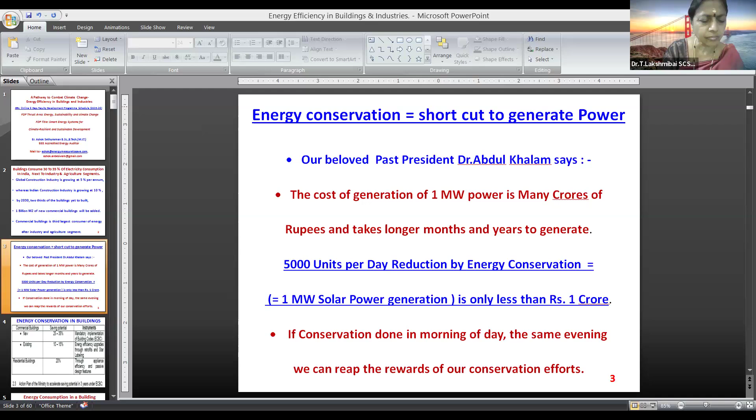Now we can see PDF, sir. In the PPT, at the top, there is a slideshow icon; click from beginning. It is in PDF format. One suggestion, stop the screen share, start the slideshow, and then reshare only the slideshow. Sir, can we share your slides? I'll try once more. Yes, you can select slideshow. My slides are moving? Yes, it's moving. Sorry for the inconvenience. No issues.

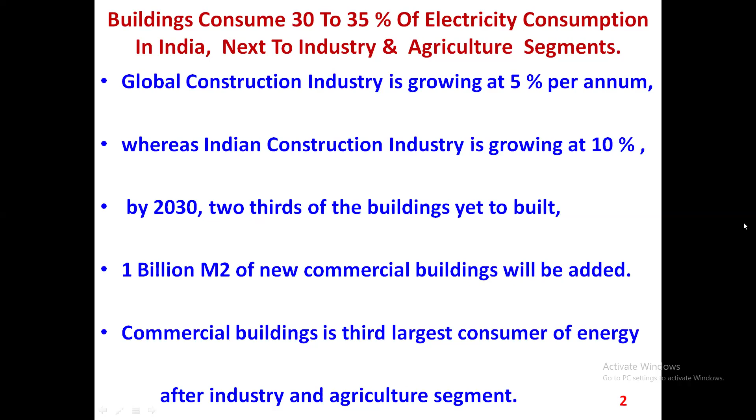In India, the building segment is the third major energy guzzler. The consumption of energy is going up, especially in the commercial segments, and the construction industry is growing at the rate of 10%. Almost 1 billion meter squared of commercial building is going to be added each decade, and buildings are going to be the largest consumer of electricity. Then comes diesel for standby usage and LPG usage, especially for residential buildings.

Here, I would like to emphasize what our beloved past President Dr. Abdul Kalam used to say about energy conservation and management, especially why it is important at the moment for a country like us.

Throughout the world energy prices have shot up, and still we are giving a lot of subsidy to domestic people as well as industries, whereas if you visit the coal mine you see how hard it is to generate energy in the thermal stations, because coal is the base load for us, the major way of producing electricity for our Indian electricity distribution system.

The cost of 1 megawatt may be many crores. For a solar rooftop it is around 4 crores, for a windmill again 6 to 7 crores, and for a super thermal station of say 500 megawatt, you have to invest almost 2500 to 3000 crores.

Whereas with energy conservation, whatever 1 megawatt solar rooftop gives us, the same 5000 units per day can be recovered or reduced through energy conservation. In fact, in energy audits we've done in many industries where they've done solar rooftop, they spent almost 5 crores for 1 megawatt solar, but were able to reduce their energy consumption by 5000 units per day by spending just around 80 lakhs, less than 1 crore. This is where energy conservation gains priority in industry, and it is very much applicable to institutions as well.

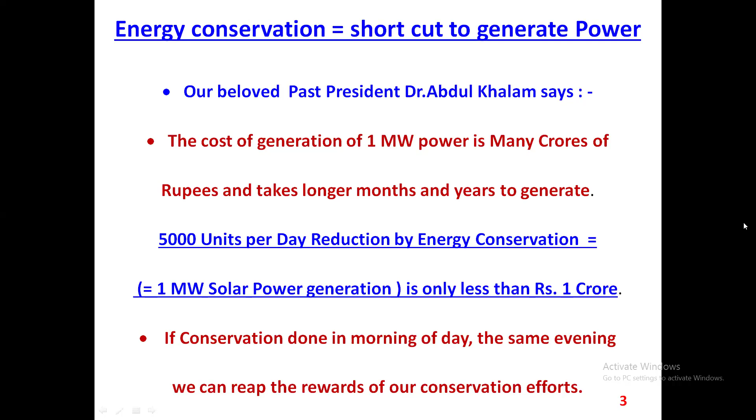If you see the energy conservation possibilities on commercial and residential buildings, almost 25 to 35% is possible for new buildings, thanks to the ECBC code, Energy Conservation Building Code by the Government of India, Bureau of Energy Efficiency. They give an in-depth analysis of all possible energy conservation and efficiency measures that can be implemented in each new commercial building. For existing commercial buildings, a minimum of around 10% is possible.

Energy efficiency upgrades through star rating are not only applied to the domestic side but also to the commercial side, and to HVAC systems too, because HVAC - heating, ventilation and air conditioning - consumes almost 50% of building cost, especially in commercial buildings. Residential buildings are also towing the line here.

People who used ceiling fans have now started switching over to air conditioners, and air conditioners which consumed almost 2 kilowatts per ton have come down to 1 kilowatt per ton, thanks to the inverter mode of operation, with a lot of inputs coming to the domestic segment from the industry side.

Especially in the residential segment, it's not only about appliance efficiency but also the passive design features of residential buildings - that's one aspect. The other aspect is that almost 20% energy saving potential is possible through appliance efficiency, the way of operation, and practices done to control or conserve electricity.

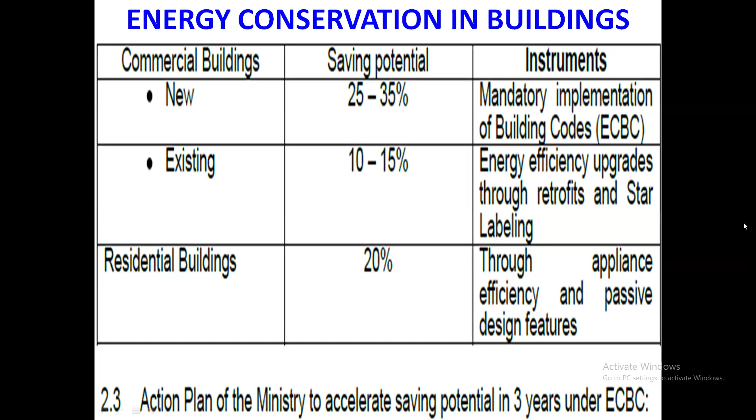So energy conservation or consumption is not only dependent on the type of building, it has to be efficiently designed and constructed, and also depends on the interior gadgets which are used. This is more important.

If you see some of the old buildings, the ceiling height is almost 10, 11, 12, or even 14 feet. In some decade-old educational institutions, we've seen ceilings at almost 15 feet, so you can see the attic ventilation is more in that building, and the building is always cool inside.

Now coming to the latest commercial or residential buildings, how it can be efficiently designed and constructed so that the lighting and ventilation can be improved over the existing system.

This is more important - the lighting arrangements or lighting accessories, the lighting system, and the luminous efficacy part of the lighting circuit. This is more important for the users in the premises as such.

The system of air conditioning can be a water cooled system for daytime usage, and an air cooled system for night time usage. Since we are tropically placed in India, we can make use of the ambient wet bulb temperature, such that we can use water cooled air conditioner packages - not the split AC or small ACs, but packages around 100 tons, 200 tons, or even 1000 tons. Normally many commercial buildings have started using water cooled versions, or the adiabatic version of air conditioning, then comes the air cooled version in the night time, just to manage the daytime and night time operations. The cooling and ambient wet bulb temperature matters more, especially in air conditioning usage - that is made use of here.

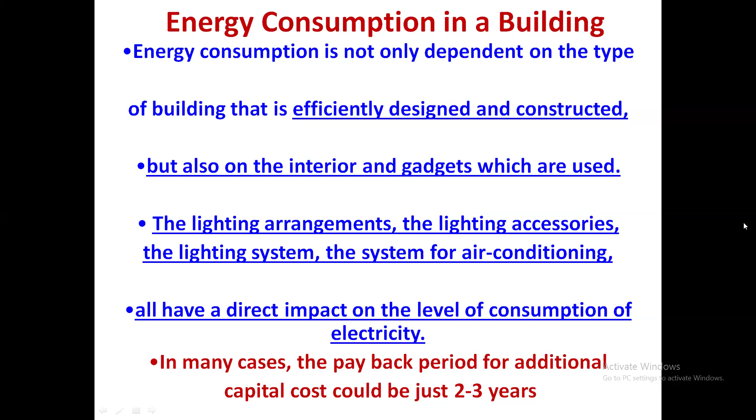If you basically see the energy balance of any given building - let's say an IT park building, a commercial building, or a hospitality building - the chiller load is almost around 50%, and the EB distribution is whatever it may be. The UPS is needed very much for some sophisticated equipment, computers, and other sophisticated systems where you cannot have downtime.

And the air handling units - this is where I am focusing more now. Normally we understand that a pathway to climate change, especially in India, can happen only through more air circulation than air conditioning. I'll repeat it again - if you concentrate more on air circulation, definitely the air conditioning can be optimized.

I will go in depth in many of my slides with case studies. This is where we want to utilize the air circulation inside the premises, how fresh air can be brought inside. This is part of the ECBC scheme where the government mandates fresh air provision in any IT building or hospital building, to maintain indoor air quality. Ultimately we boil down to indoor air quality for a given building, and at the same time the CO2 or CO present in the premises also needs to be maintained - if it goes beyond the limits, that will sicken the occupants. This is where we are concentrating more.

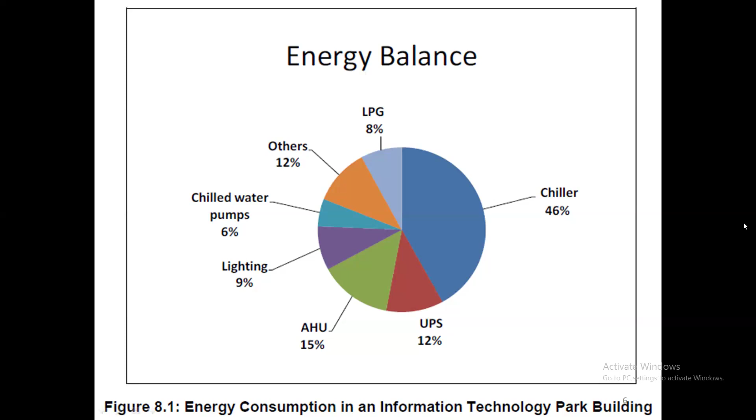Then comes LPG, which is used in commercial buildings as well as on the domestic side. There also a lot of changes are happening now as such.

This 2017 and 18 ECBC code by the Bureau of Energy Efficiency gave a lot of inputs. They have clearly demarcated what is the EPI, the energy performance index for a given building, and what is the EPI ratio for the proposed building compared to the existing standard building.

The EPI ratio decides if this is applicable to institutions like our colleges, IT buildings, commercial buildings, hospitality buildings, and even residential gated community buildings. It's calculated as the annual energy consumption in kWh divided by the total built up area. The unconditioned basement, where cars are parked, is excluded from this calculation.

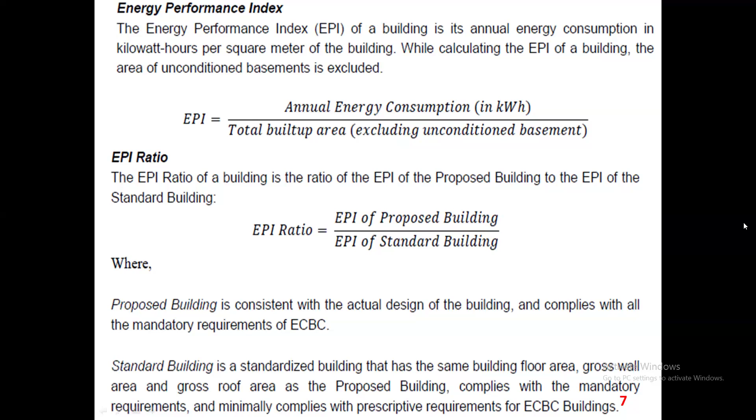This total divided by the total area gives the energy performance indicator, which is the benchmark for each and every building. When we do energy audits, even from colleges, we can do energy studies, walkthrough audits, and energy surveys to see where energy consumption is happening and how it can be optimized, reduced, or controlled. So the standard building versus the proposed building as per the ECBC, Energy Conservation Building Code - what is the difference and how can it be achieved? We will go in depth on this.

If you see the government norms, it starts from 100 kilowatts for a public utility building, and many of these buildings are mandated to have energy audits done. That is why building energy auditors have come into play now, and it is in force. Many college staff and professors also opt for this.

One is industry based energy audits, and they also take up building based energy audits - we have ample scope because the third major energy guzzler is buildings. This includes commercial buildings, hospitals, IT parks, office buildings, banks, insurance companies, and other public utility buildings - they are all supposed to have energy audits done and start reducing their consumption for sustainability.

Ultimately, we are all working towards ESG. This is where every college or building owner is made responsible for their energy consumption, and they are made responsible to reduce their energy consumption as well.

So office buildings, hotels, hospitals, retail malls and IT parks come under the 4 climate zones across the country. Apart from that, the climate zones also vary - one is warm and humid, another is composite, and another is hot and dry. A place like Rajasthan shows the hot and dry climate, while a place like Chennai is warm and humid, and some internal areas are composite.

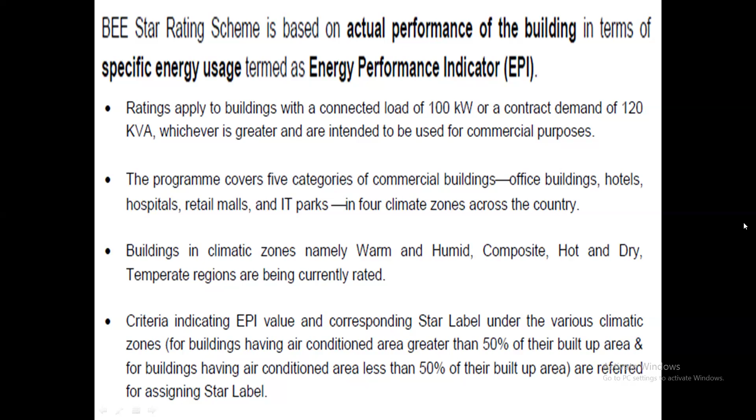I am taking a case study on why the energy performance indicator for a given building varies due to envelope optimization - building envelope optimization, lighting optimization, HVAC optimization, and controls. Controls means now the trend is, previously buildings only had a BMS. Now building energy management system is incorporated into the BMS system, and ultimately the goal of the building is to reduce consumption based on the benchmark, and see how much they are able to reduce it.

This is a CESE building at IIT Kanpur. The case study shows that through envelope optimization, consumption went from almost 240 units to 208 units. I will go into how this can be done in the next few slides, and also the lighting optimization.

For lighting optimization, now daytime lighting, light pipes, and polycarbonate lighting are coming into play, where the light needs to be distributed equally inside the premises - that is more important. Some LED applications are getting localized, whereas the lighting design or luminous application needs to ensure the distribution is smooth, scattered and diffused.

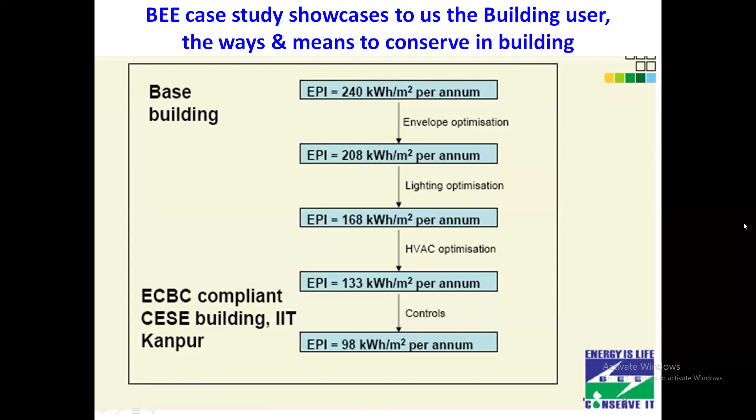So you can see the windows, roof, skylights, doors, openings, the design features. In the building envelope, what we are seeing is the visual and thermal comfort of the occupants. The building envelope takes care of both the visual comfort as well as the thermal comfort of the occupants. This is concentrated on by the architects as well as energy auditors and energy professionals, who can work together with the architects and make the building envelope more efficient than the existing one.

Then comes the mechanical systems and equipment. By mechanical systems I mean an air conditioner. It may be a split. The window air conditioner is gone; it has gone totally obsolete. The split air conditioner, a package air conditioner, a ducted split, or a multi-tonner package. All these things come in the next line.

Then the interior and exterior lighting. Thanks to daylighting, more daylighting provision is there. Many IT offices have understood that daylighting has to come from sunlight, because lighting from the sun is almost 600 lumens per meter squared, whereas whatever you get from a 4 feet LED tube light is around 100 to 110 lumens per meter squared only. So solar lighting is given priority, especially in buildings. Many buildings and colleges have a dome where the sunlight comes inside as a light pipe, and it is made use of inside.

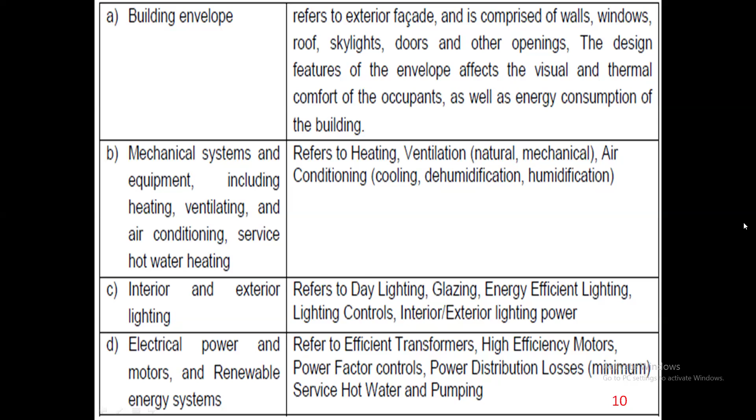Coming to the thermal side of the building, thermal comfort, what is the heat loss comparison? If you see the U factor, I'll go in depth on the U factor also. We have seen single glazing and double glazing windows. Many modern buildings, green buildings, go for double glazing windows so that the heat loss across the windows is minimum. The windows are the areas where not only light but heat ingress comes from the sun to the inside. This can be arrested only if we go for double glazing, especially in the windows.

The light from the sun passes through and the room stays cooler. You can see the glass with coating. Instead of going for double glazing, there is glass with coating. This is a retrofit that has come. For any replacement we suggest for the industry, a retrofit is also possible. So first let us try the retrofit. If the effect of the retrofit is less or it gets derated, then it is better to go for a replacement, especially with double glazing.

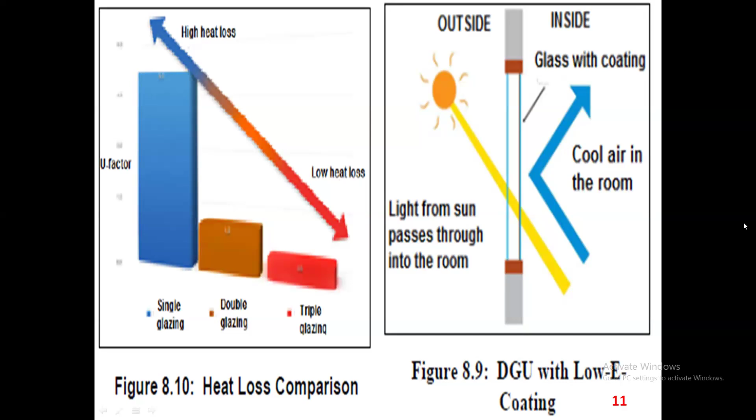Especially you can see the outside visible light and the solar radiation. These are all the areas that are relevant to daylight harvesting basically. See, for an EEE department, why I am talking about the buildings' thermal side is because the thermal side of the building decides the energy consumption for the given building. The solar heat ingress for the given building is very much more, so definitely that needs to be controlled.

So this is where the visible light, the solar radiation, and the U value come in. Ultimately the U value denotes the conduction of heat gain through the glazing unit. The lower the U value, the better it is for us.

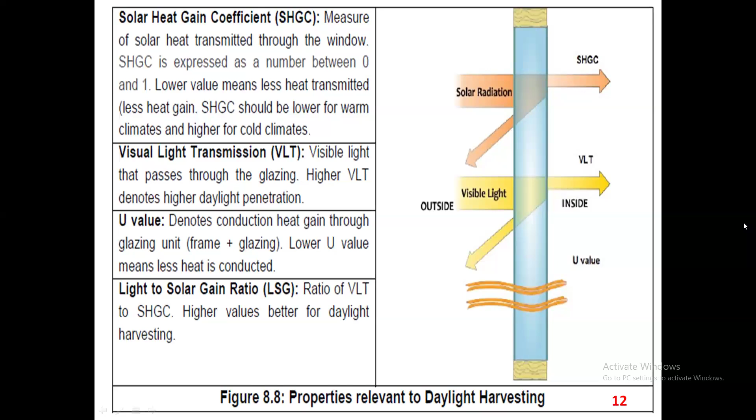This is the three-tier approach the Bureau of Energy Efficiency, through the ECBC code, has suggested to all building owners. First, heat avoidance. Not in Chennai, but in Telangana, the government has mandated only white roofs for heat avoidance. Then comes passive cooling, where attic ventilation can be improved. Then comes mechanical cooling, the tier 3 approach, where heating and ventilation through air conditioners are done.

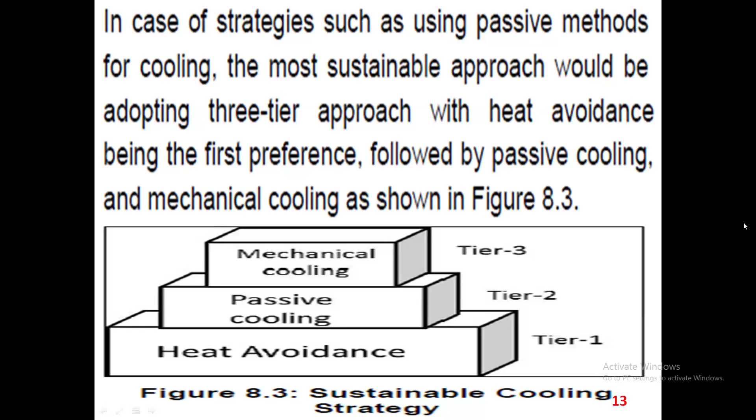So like the Pareto principle, if the small subsystems are operated smoothly and efficiently, the compressor run hours can also come down. This is where every industry or building management system is working on how to reduce compressor run hours and how to make the compressor loading run efficiently during those run hours.

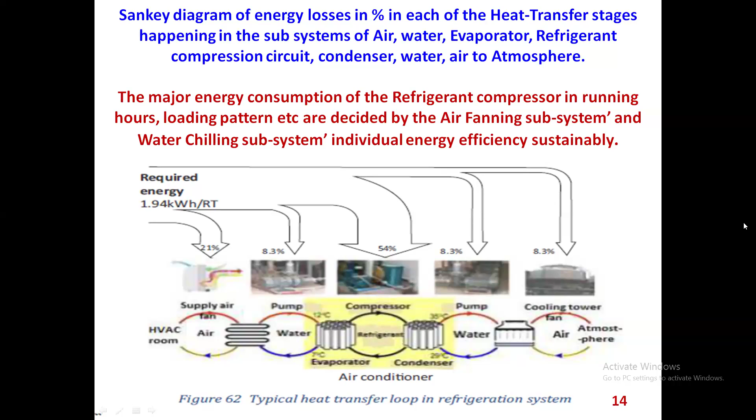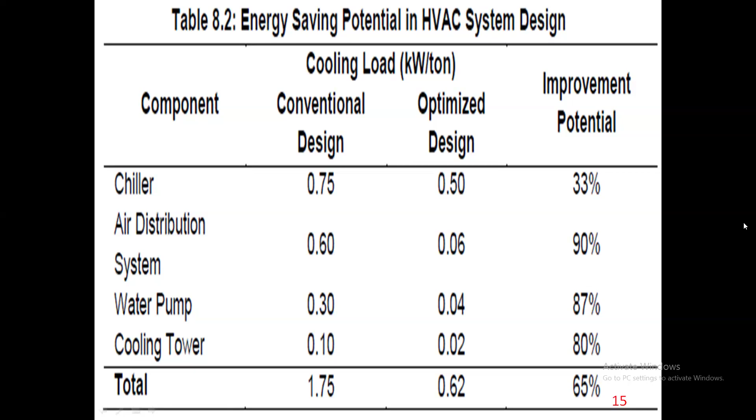You can see the difference between a conventional design and the optimized design, and the improvement potential for the chiller, air distribution, water pump, and cooling tower. Almost 65% improvement is possible, especially in an HVAC system, and that is what is happening now. I suggest you visit any of the green buildings in the area where our college is. You can find so much difference happening there.

Air circulation consumes only 10 watts per square meter, whereas air cooling needs around 40 watts, and air conditioning takes around 200 watts per square meter. Air circulation is getting superimposed on air conditioning, especially thanks to BLDC, brushless DC fans. Mild circulation of air inside a room or hall maintains the heat load, and the evaporation from the human body is also removed, so circulation now gains more importance than air conditioning.

The government has already made a mandate for 24 degrees, and many industries and buildings are operating their air conditioned premises at 27 degrees, and they see excellent human comfort.

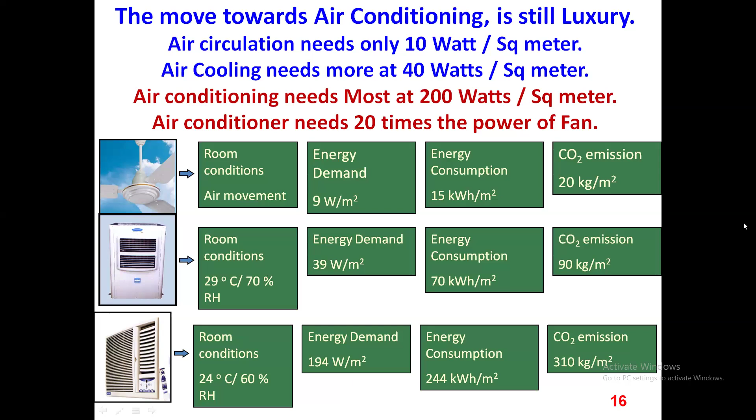BLDC fans versus old fans, we are all aware, but the main point is fans never run at full speed. When you run at middle speed, say second or third speed, it takes around 6 to 11 watts only. Domestic users with inverters who switched to BLDC fans find their inverter backup time almost doubled. So the BLDC fan gives huge savings in both VA and watts.

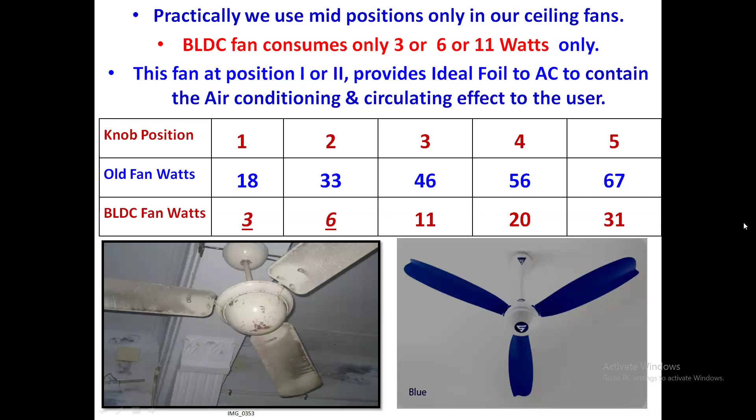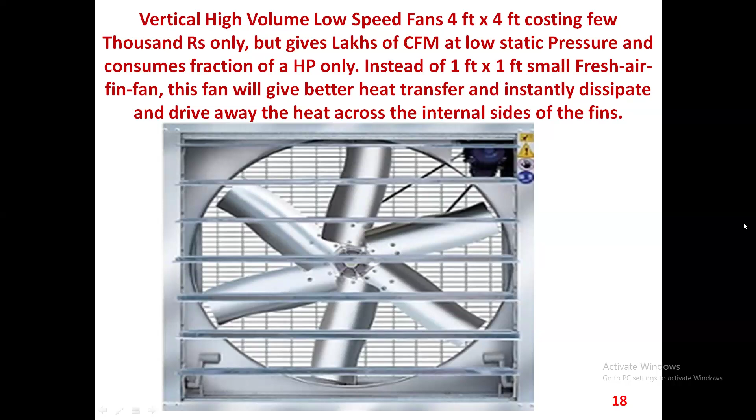Attic ventilation with high volume low speed fans is being taken up in green buildings and infrastructure areas. It costs only a few thousands, but it gives lakhs of CFM, cubic feet per minute, of flow at very low static pressure. In a place like Chennai, in the afternoon around 2 or 3 o'clock you feel a breeze; that breeze is possible with these HVLS fans, vertically mounted. And this is a horizontally mounted HVLS fan. Many commercial buildings have started installing them.

They are able to achieve the wind chilling effect inside, and ultimately it is able to replace many of the hundreds and hundreds of ceiling fans. And many of the industries, many of the buildings have gone for these HVLS fans, and it is a welcome trend. If you go to Central Railway station, in the waiting room you can find so many of these HVLS fans running, and the place is so cool even compared to the ordinary existing man circulator fan. This is doing a better job.

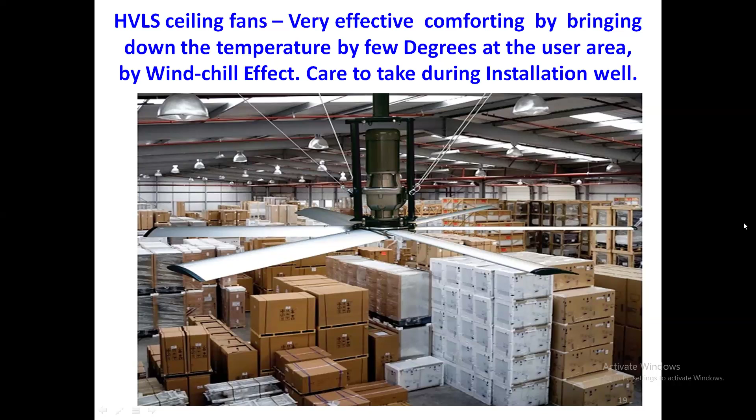Let us understand what is natural ventilation, the effective schemes of natural ventilation. This is more important. If you want to take a pathway towards combating climate change within the premises, these are all the areas where the air circulation, the natural circulation and the forced circulation, how this needs to be done.

The hot air is always at the top. You can see what are the wrong ones and what are the right things to be done, and you can see the difference, and how the positive cross ventilation of the given premises is to be done in such a way that the occupants who are working in the industry always feel a breeze of cool air inside the premises.

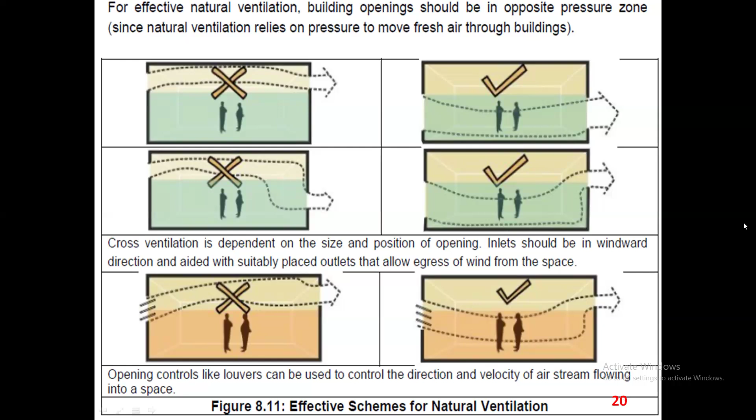Coming to demand controlled ventilation, this is where the IT buildings, where let us say around 1000 seats or 2000 seats or 500 seats are occupied by humans, use carbon monoxide and carbon dioxide sensing. We are not talking about oxygen sensing because it is a trace, but we talk in terms of CO2 measurement or CO measurement.

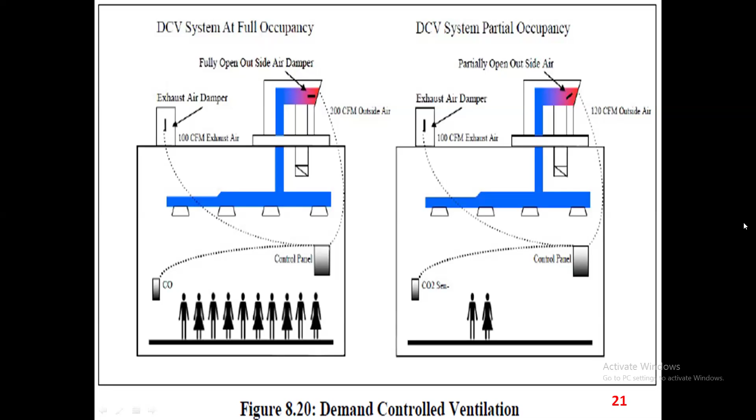So that a fully open damper at the fresh air or a partially open one, based on the load, can be adjusted. The CO2 measurement is a critical parameter, especially in many closed buildings. You can see almost 1000 ppm. 1000 ppm is the ideal CO2 ppm to be maintained.

And where do our buildings stand? I don't say in the college, the college is all well ventilated. But if we take the case of IT buildings or any closed buildings, the CO2 measurement, CO2 monitoring and CO2 control, over ventilation or under ventilation. We need to see to it that you have ideal ventilation, and in 7 out of 10 cases it is only under ventilation.

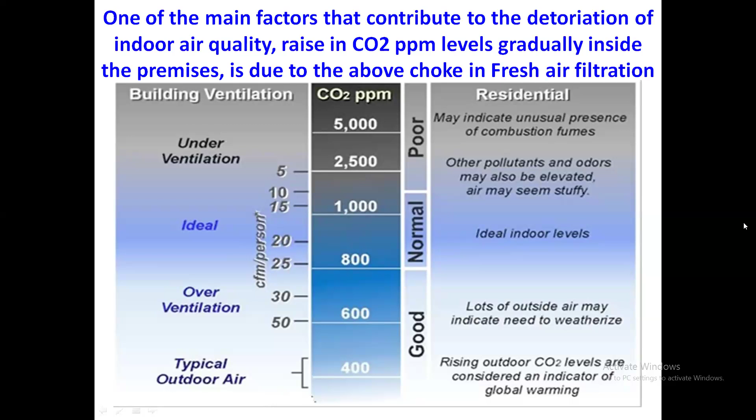People are suffering medical problems due to under ventilation. So it needs to be ideal or slightly over ventilated, to have CO2 ppm measured values around 1000, 900 to 1000, 900 to say precisely.

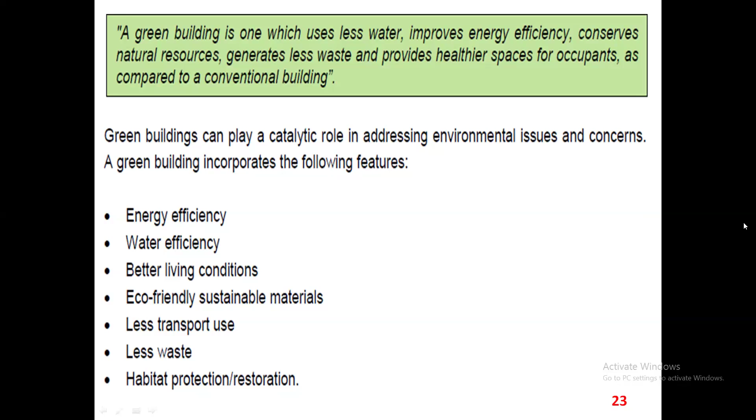So for the green building, it is not only energy efficiency, which plays a catalytic role, but we can see water efficiency, better living conditions, sustainable materials, transport use, wastage, and habitat protection. That is more important. The government has given a lot of missions: the energy efficiency mission, the water mission, the solar mission. Ultimately, the green building covers all the other aspects and can play a major catalytic role towards addressing the ESG parameters for any organization.

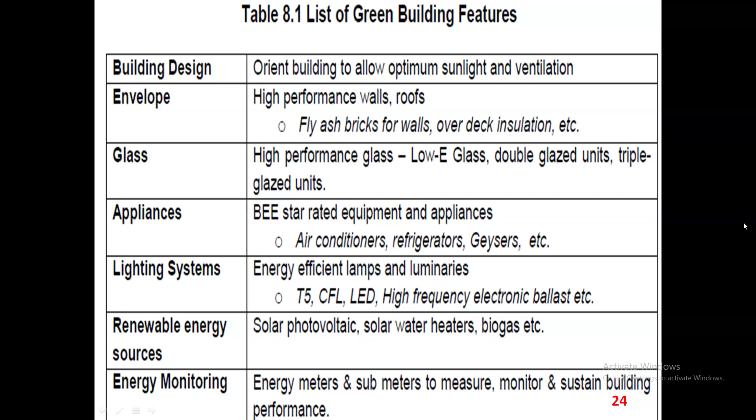And everything and everywhere, the Bureau of Energy Efficiency has said only one thing: monitor your energy consumption, say from a 3 HP or a 5 HP motor or machine, or anywhere on a 3-phase circuit, and only then can you take control, monitor it, and target the control towards that. Water management: though rainwater harvesting is said and done, again it needs to be done scientifically.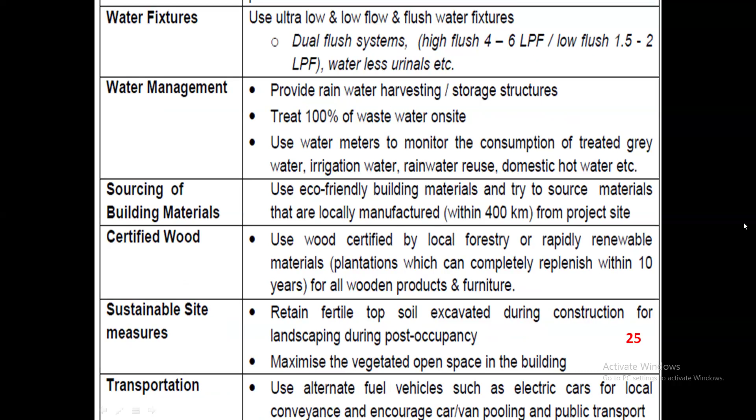The sourcing of building materials is also done with eco-friendly materials, and that too from nearby sources only. The certified wood, the green wood, is also used from the local forestry; that also matters more here. The sustainable site measures, this is where we are concentrating more. And the transportation, where we can go for EV type, alternate fuel vehicles and other things.

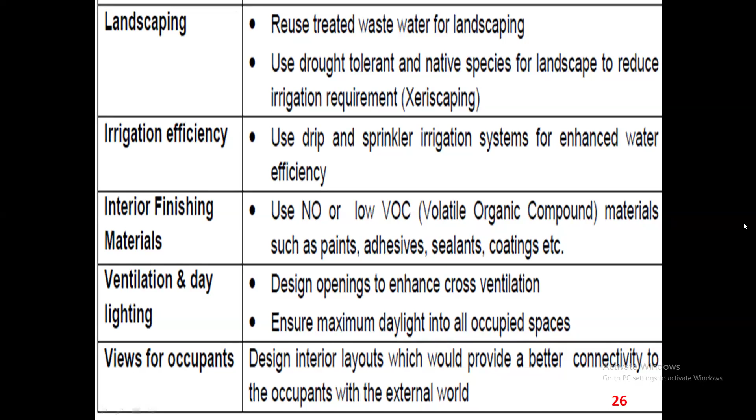So the landscaping is important, the irrigation efficiency; agriculture has given us a lot of inputs towards drip and sprinkler irrigation, and we are making use of it. And in the interior finishing materials, you see that volatile organic compounds are avoided in paints and adhesives, etc. And ventilation and daylighting, we are giving more importance here. Views for the occupants are more important because that also makes aesthetic sense.

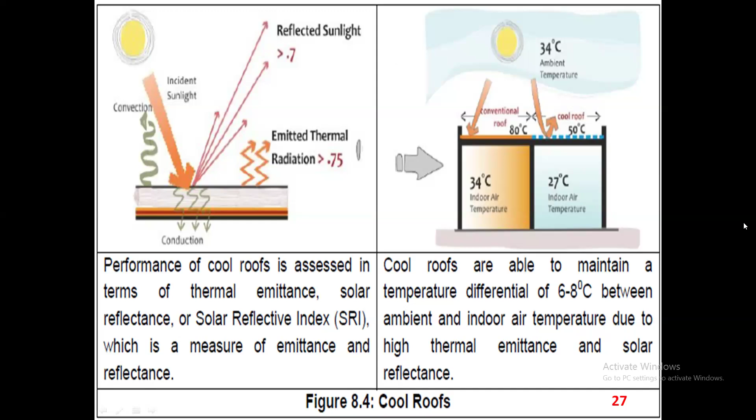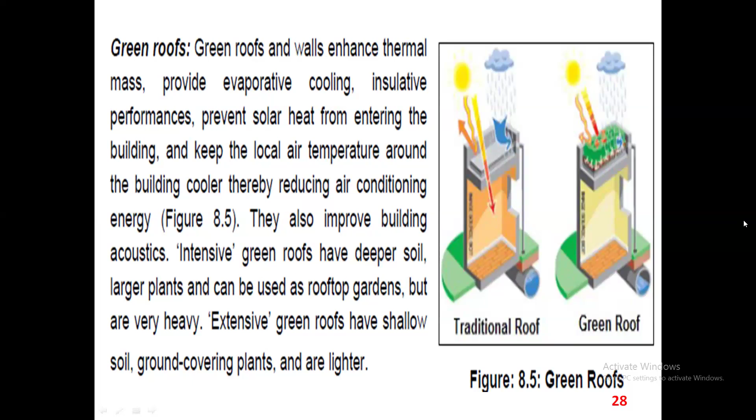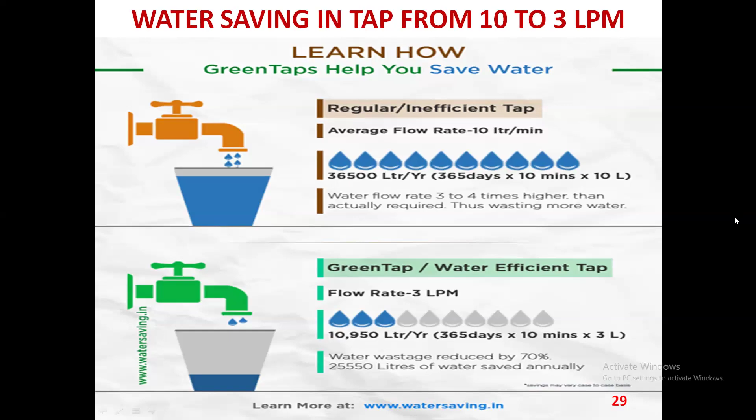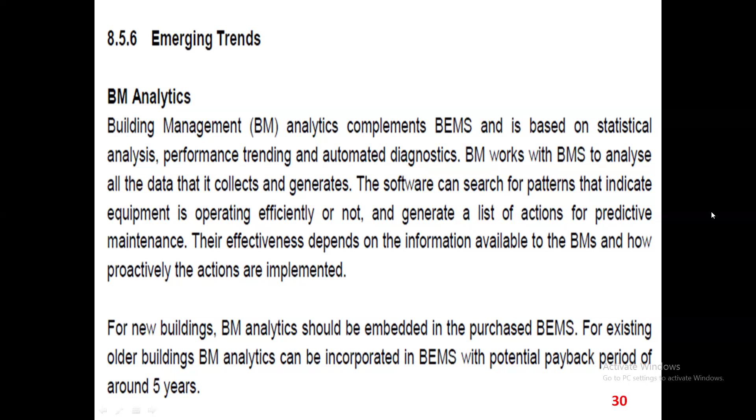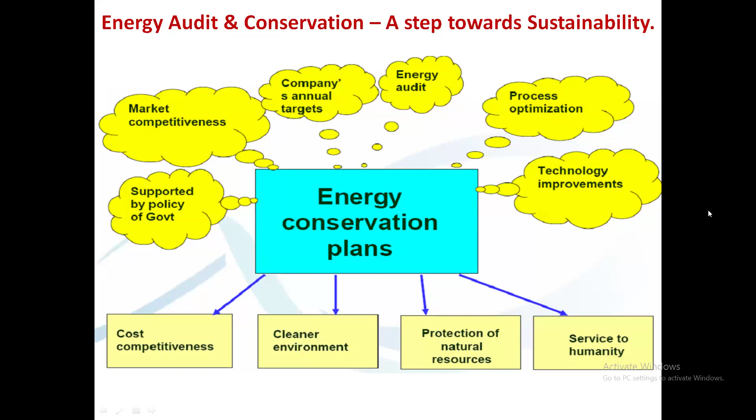If you see, go by the nameplate of any equipment. When you from the college visit industries, you can see the nameplate for the given machine, motor, pump, blower or compressor, whatever it may be. What does the nameplate say? What is the efficiency as per the nameplate, and what is the efficiency as per the latest energy efficient machines' nameplate? These are the benchmarks. We go by the benchmarks and how this can be addressed.

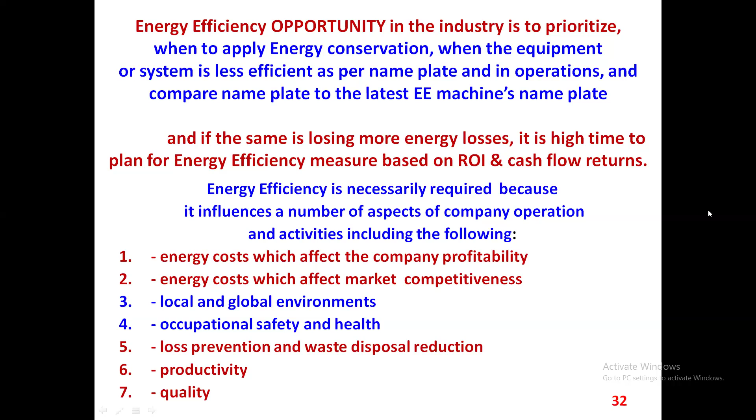Ultimately, every company sees the energy cost affecting its profitability and competitiveness, and they are not able to compete in the local and global environment. All these things are important. Once the energy audit is given focus and priority, and a lot of in-depth study and implementation is done, many of these factors, on the productivity side, the quality side, and even loss prevention and waste disposal reduction, can be addressed thanks to energy audit and conservation done routinely and passionately by the industry.

See, why is energy audit or energy consumption analysis needed for a given industrial process? The industrial process has energy, water, chemical, raw material, everything. But if it is consuming more - let's say your fridge consumed 3 units per day, that is a 1-star rated fridge, the latest fridge only consumes 1 unit per day. I'm just giving a domestic example, or you can take a 4-wheeler or 2-wheeler, which used to give around 20 to 30 kilometers per liter, now it's almost 50 to 60 kilometers per liter on a 2-wheeler. These are all the areas.

The equipment or process gets damaged inside when excess inputs are given, and emissions also increase. So optimize the inputs - the products will improve, and the liquid and solid waste also comes down, both direct and indirect waste.

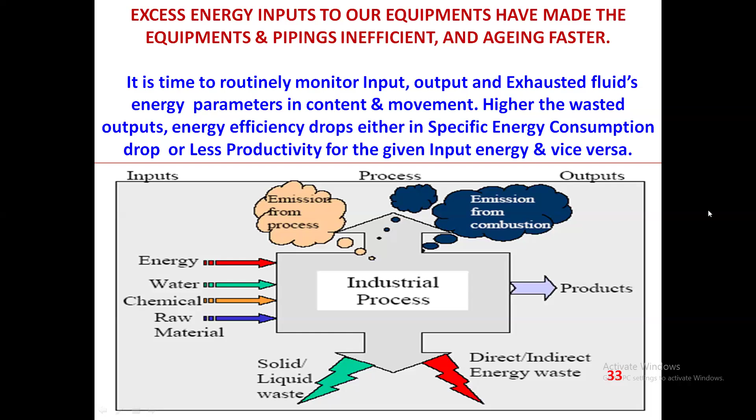So routinely, whenever we go for an energy audit study for a given industry, we check what are all the production machines, how they are, what wetted parts are there, and how these can be restored. For example, the supercritical thermal stations had a big study, and they found that when we replace the wetted parts inside the thermal stations, we can raise efficiency from around 40% to 45% - a 5 to 7% improvement - by replacing the wetted parts inside the turbines and thermal station systems.

For utilities, if you see the end-to-end output parameters, that will tell you where the loss is happening on the distribution side. Whatever you say, the T&D loss - if it's around 20%, only 5% goes towards transmission loss, and 15% goes towards the distribution side.

Thanks to Tamil Nadu's latest efforts, the T&D loss, ATC loss in Tamil Nadu is around 10% now. But throughout India, as Dr. Beloved APJ told us, it's around 20%, and we want to reduce it gradually to 15% then 10%. China, Japan, or Germany achieved around 4 to 7% T&D loss. Why not us too? It is possible.

The end-to-end loss is what we concentrate on in industries too. If it's a compressor utility, we concentrate on generation, distribution and usage; for fans, we concentrate on generation, distribution and usage, and the static Pascal - this is more important, the static Pascal.

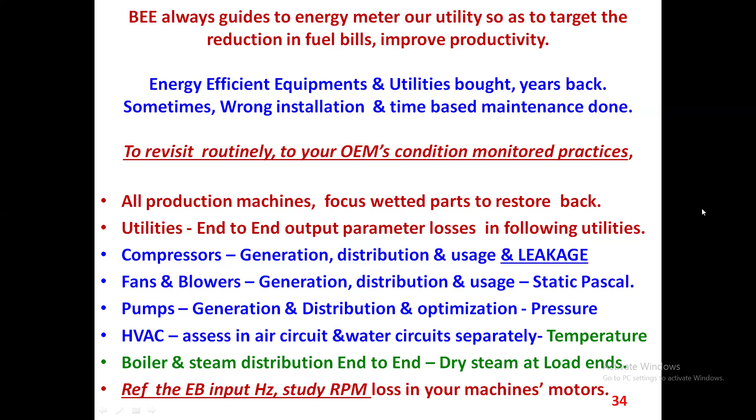The same thing happens with pumps, HVAC, or boiler and steam distribution end to end. Always when you visit an industry, first check what is your EB input hertz and what is the RPM of all the machines. This is easily measurable with non-invasive, optical type instruments - RPM meters and stroboscopes are there. You can measure all the machine motors and see what the production loss or utility loss is for the given industry.

So coming to the energy audit - what is given as energy input for a given system, equipment, or machine? What is the useful output, how to increase the useful output, and how to reduce the wasted output. This is the working procedure of energy audit that we follow in industry.

Let's say it's a 40-watt tube light with a 15-watt choke. Now that 15-watt choke is removed, the tube light is removed, and first they brought it to LED with an electronic choke that reduced consumption from 15 watts to 2 watts. The 50 hertz operation of lighting was taken to 20 kilohertz, especially for lighting, and automatically luminous intensity also improved by 15%. So that's a typical case study from a fluorescent tube to LED.

Not only for LED - you apply the same approach for pumps, or any other machine. You check what is the useful output, how to improve the useful output, and how to reduce the wasted output. This is the procedure in energy audits.

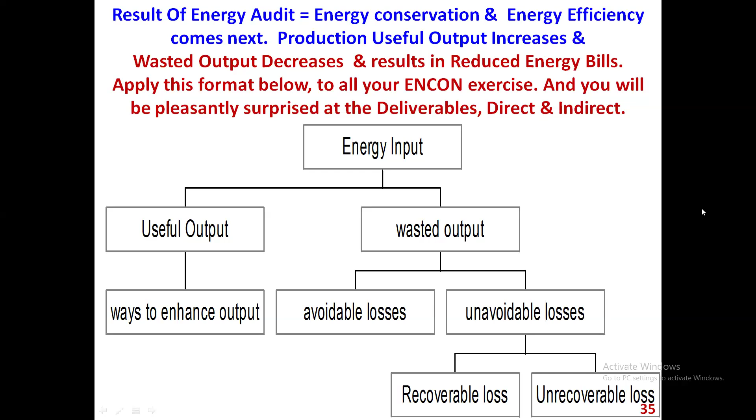Coming to when you enter an industry, there are three types of machines: constant torque machines, constant power machines, and variable torque machines. This is how we classify machines for any industry.

All the production machines invariably become constant torque machines, and all the utilities, especially the centrifugal blowers and compressors, become variable torque machines. The scope for energy saving is more in variable torque machines, because ultimately the motor power is directly related to the torque and speed. If you are able to manipulate the torque demanded by the load, and adjust it through the VFD, you can adjust the torque, adjust the speed, and definitely achieve savings. I'll come to you on that case study also.

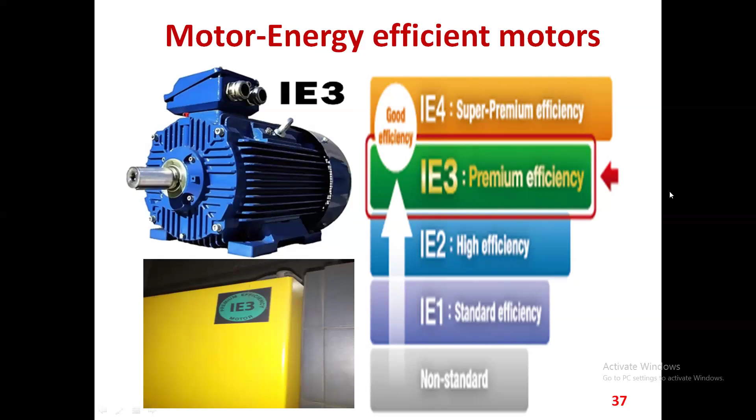Thanks to the latest international energy regulations, IE1 to IE2 to IE3 to IE4, and IE5 also has come into the market now. The government has mandated from 2018 onwards that companies, OEMs as well as running user companies, need to go to a minimum standard of IE2 efficiency, then they have to go for IE3 motors. The RPM gain on each version is more, and that is how production also goes up more. You can see from initial cost to running cost, almost 99% of the running cost goes towards power. So always pick up the best possible, most efficient motor available.

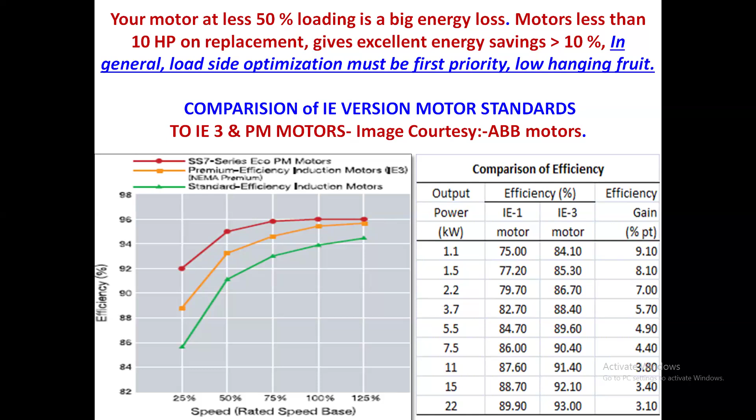The Bureau of Energy Efficiency has given a lot of inputs, and they have clarified only 4 steps. Wherever possible for a given industry, as I said before, instead of giving 240 volts to your LED tube light, you just give 200 volts. Instead of giving 415 or 440 volts to your motor which is only 3/4 loaded, you just operate it at 400 volts. Trimming the input side is a low cost, zero cost exercise, and it is possible. Accurate monitoring is the first step - monitoring the power, kilowatt and kVA for a given equipment, and then trimming the energy inputs.

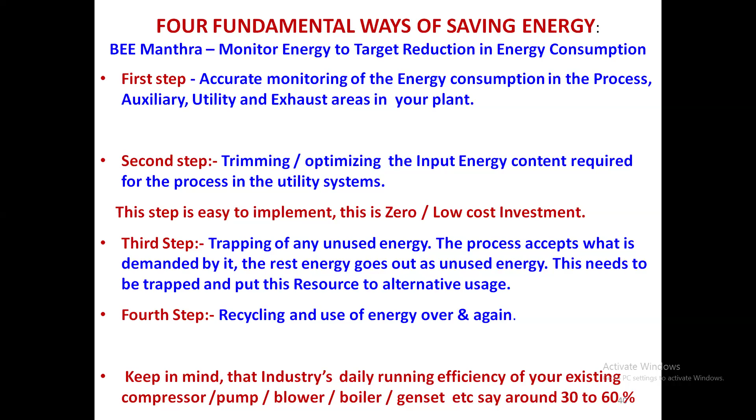The third step: whatever the equipment is getting, say the compressor is running, a lot of heat is wasted through the exhaust. How this can be retraced, recovered, and put to use. When I worked with a Dutch user group in Holland, they said they are not allowed to waste water which is more than 40 degrees centigrade as effluent from the industry. Whereas in our place, we are wasting water more than 60 to 70 degrees as effluent. So trapping or recovering the heat embedded in the system - the MCP delta T plays a major role - the heat embedded in the water getting wasted needs to be retrieved. This is where we are concentrating more now, and recycling wherever possible, over and over again.

What I was telling you before, this is the case study that shows it. We have seen in many industries, when operating at 400 volts versus 440 volts, around 10% savings, around 5% savings on the motor. For lighting, especially the previous HID type lightings, it was around 10%, but for LED now it's around 5% only. High intensity discharge tube lights, especially fluorescent tube lights, had a lot of savings, but not as much on LED - LED still gives savings of around 5%. This we have seen through our case studies in our industry.

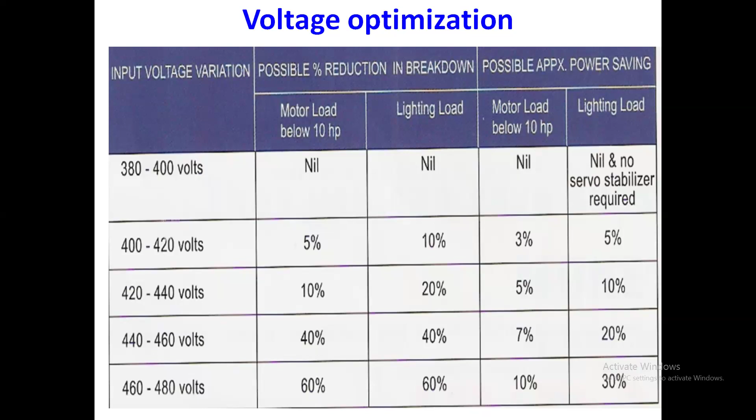Thermal imaging - whenever college professors visit an industry with a thermal imager or a stroboscope, the industry welcomes you with a rose garland, because they don't know what is happening inside the system. This predictive monitoring through thermal imaging lets you provide a lot of inputs to them. It is a win-win situation for the college as well as for the industry.

Infrared thermal imaging is a mandatory tool for any routine maintenance people in the industry now. Even MSMEs are trying to buy it now, because it used to cost many lakhs before. Now it has come down to less than 50K.

Micro level monitoring of all the equipment and macro level analysis - this is what is needed by the college, academic and industry interactions. This is what is seen through infrared thermal imaging.

What is the temperature of the motor at the 3, 6, 9 and 12 positions? Between 3 and 9, it should be less than 20 degrees difference; between 6 and 12, it should be less than 20 degrees; and driven to non-driven end, it should be less than 10 degrees.

These are all areas where the thermal imaging shows the hot spot as a loss indicator toward the motor's health. A motor's thermal condition is talked about with the GD-squared value for the given load coupled to the motor, whereas the motor's thermal health depends on the temperature rise in the motor - a motor that is warm means it is good.

If the motor is hot, it means it is losing energy and running inefficiently. If the motor is cold, just idling, it means it is losing even more power than a warm motor.

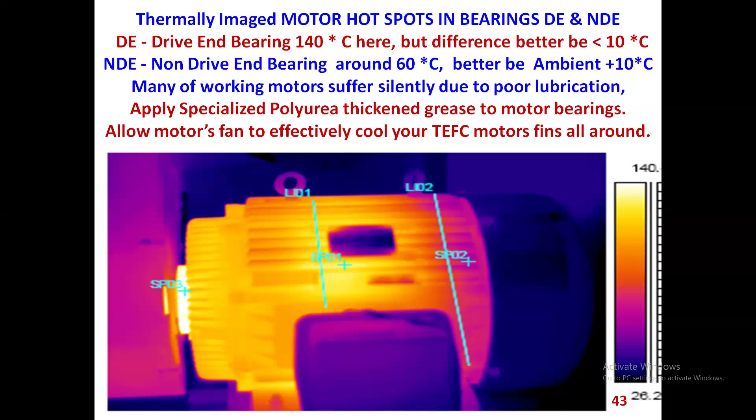Here I would suggest institutions can play a major role, especially in academics - you can see any equipment before the failure begins, in the proactive, predictive and fault domain stages.

You can do ultrasound monitoring, vibration monitoring, and measure vibration as acceleration due to gravity per second. All the displacement as well as the acceleration can be measured with a single plug and play probe now. These are all used by many college and academic professionals in industry today.

Ultrasonic measurement, especially for pumps, is more critical now, and the industry is struggling to know the pump flow rate. This ultrasonic flow measurement, from college to industry, will make everyone very happy.

Oil analysis - what is the oil condition? Carbonization of the oil is more important to track. Then comes infrared imaging - if you see, infrared imaging is almost at the tail end of the failure process.

Then comes audible noise from a given motor or machine, then the machine becomes very hard to touch and fails already. So you have scope for ultrasound, vibration analysis, and oil analysis from the mechanical department, and infrared analysis from both electrical and mechanical departments. You can do wonders in industry with these non-predictive, non-invasive, portable instruments.

This used to cost more than 10 lakhs before, now it has come down to a few lakhs. Every college should have these kinds of portable audit tools to assess the machine's health and the process health.

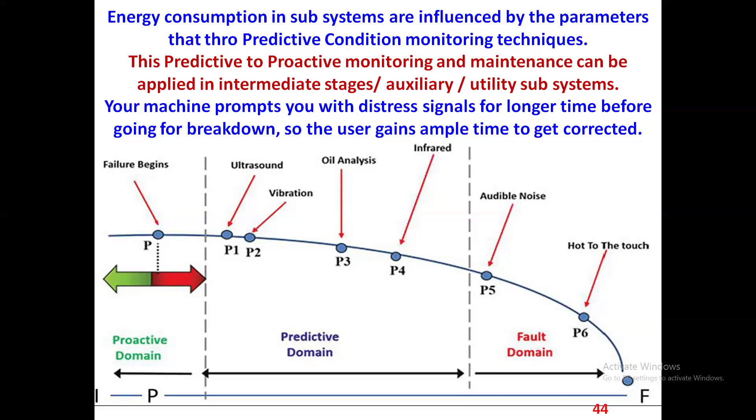I was telling you that the T&D loss of 20% has to be brought down. The national grid and the government are working on that, but from the industry side, we can optimize the end-to-end energy loss - it should be less than 10%, or even less than 5%.

We see that industries with end-to-end energy loss less than 5% are the goal. This loss can be on the piping side, the ducting side, or the fan side as well.

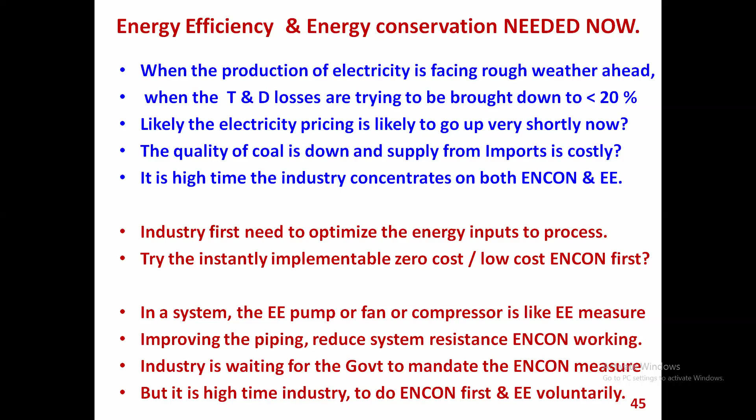I'm going in depth on a blower now. A blower, normally the motor is around 80% or 90% efficient, but if you look at the blower's overall efficiency, it is only around 56% - system efficiency. The scope for energy saving in blowers, pumps and compressors is much more than in the motor itself.

This is the main idea, the fulcrum where we as energy auditors are working - on the load side of any system, subsystem, utility and auxiliaries. Wherever we are able to put our hands, we try to manage and measure it.

We measure the volume flow, we measure pressure in Pascals digitally - everything has been made into digital measurements. Thanks to digitization and IoT monitoring, we are able to see a lot of inputs about the wrongness happening in the machines or in the process.

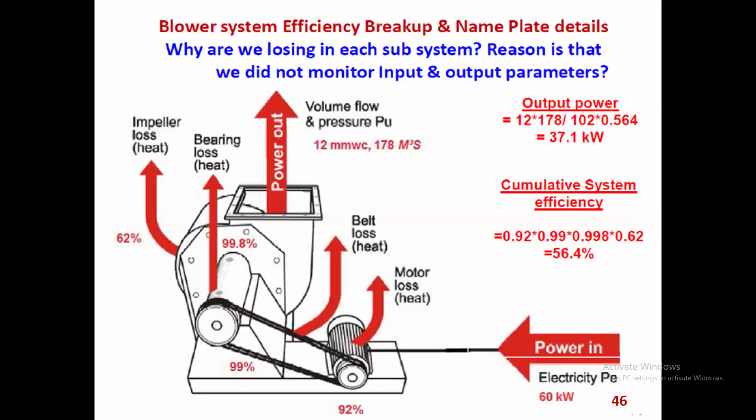This is what I was telling you. A typical electrical motor gives a definite torque, fixed torque and fixed RPM. See, here by a combination of a VFD and just operating the belt and pulley to a different size, you can see it is an air handling unit motor, done in a Danfoss unit in Chennai.

Basically, they are VFD majors, OEMs, but they are also surprised to see the case study. The blower RPM was fixed around 860 before at 50 Hertz, and at 33 Hertz it is around 550 RPM. The energy savings achieved by just the belts and pulley changes for a given motor to blower gave around 10%, and the VFD by the voltage reduction gives around 10%. Around 22% savings is possible at a cost of less than 20,000 only.

And people are going for electronically commutated fans, spending around 4 lakhs or 5 lakhs. But when you spend around 20,000, you can see in your college also many air handling AHU units are there. Just see the circulation systems, not the replacement, retrofit this, and you see the 20% saving. This will be a case study for your students, for your next generation.

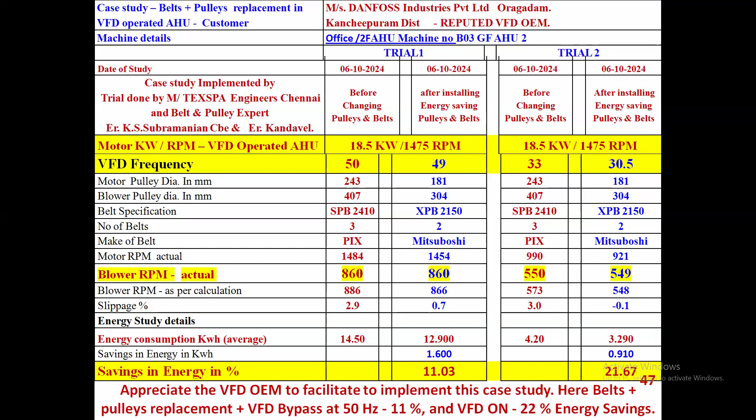This is what I said. This is an area throughout the world, throughout India. In fact, our energy audits and the case studies implemented after the audits have given a big scope. The curve you see, the variable torque versus the variable power, at 50% of load there is a gap. That gap is addressed by the VFD. The load needs lower torque only, especially the blowers at lower speeds. If the VFD is made to address it at the lower torque, definitely that 15% savings is there on the existing motor.

See, this is where a VFD coupled motor along with this pulley and belt combination gives around 15 to 20%. This is a cakewalk, and many of the IT buildings and many buildings are doing it now instead of going for EC fans. EC fans are very costly. It is a proven product, but the cost is so high. It is 10 times the cost of the existing retrofit. That needs to come down.

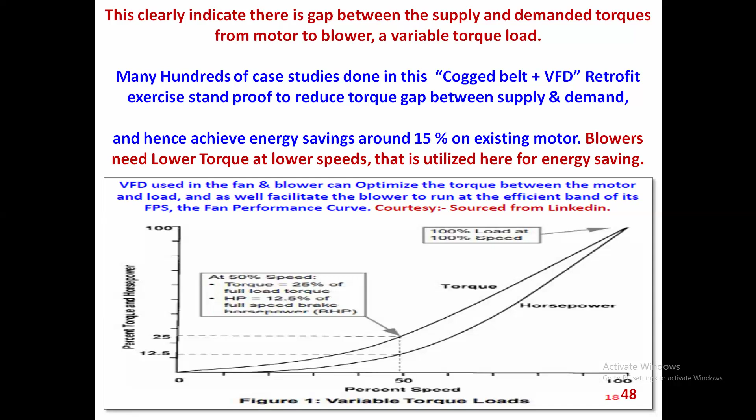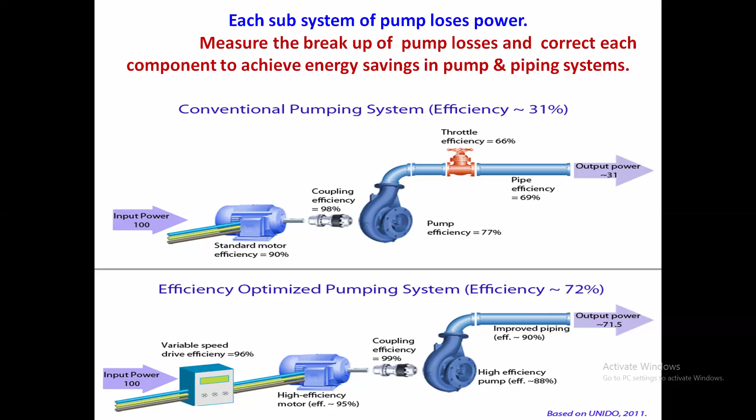In the case of pumps, around 70-80% is possible, whereas the old system efficiency is around 31%, the new efficiency is around 70%. You can see the difference. The difference is coming not only at the motor end, but at the coupling, at the pumps and at the throttling efficiency, everywhere. Ultimately, 40% scope is there, especially in the replacement of pumps and the piping systems. We don't say pipings are to be replaced, but see to it that the efficiency can be improved upon here. You can see the 5-star rated pumps.

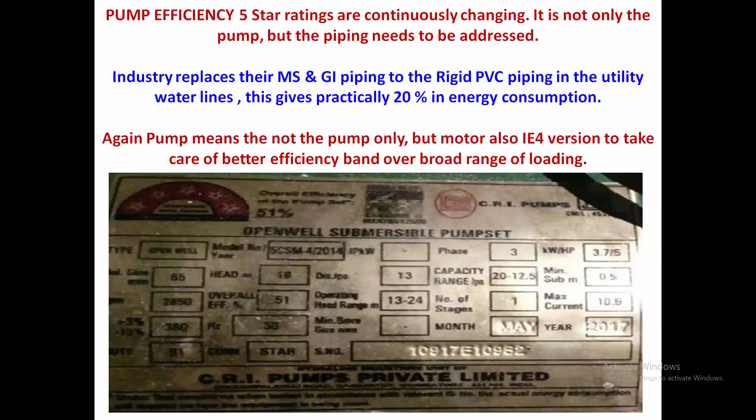The agriculture farmer has understood, let us go for rigid PVC pipes, but many of the industries are still using MS ERW pipes or GI pipes, where there is around 20% loss due to pipe friction. See, water has a surface tension and the pipe has a pipe friction. Both make the velocity of the water flow to the overhead tank drop automatically, and here you can see the savings by going for rigid PVC pipes. This is the way the piping needs to be done. It is not the pump replacement alone.

A pump having a flange of 3 inches means the piping or the header should be around 4 inches or 5 inches or 6 inches. Make a slow entry and make a fast output. That is what traffic sense has told us: at any bend on a road, enter slowly and come out fast. This is universally applied. The rotators need to be small and the conductors need to be big. These are the universal thumb rules which we try to apply in each and every energy audit case study for the given industry.

When the pump is replaced, to showcase to your students, you can say, when you spend around 20,000 rupees, you get around 7,200 rupees per year, almost 36%. This type of interest you can get nowhere, only in terms of metered vaddi or kandu vaddi. That is not possible. But in the technical area, in the replacement of old to new gen pumps, around 36% energy savings is possible. This is what we have to capitalize on.

First, let us measure what the pump delivery is, what the pump nameplate says, what the delivered water is at the overhead tank in our college or in any of the premises, where we stand, what the difference is and how to address that. These are all small pet projects you can take up. And going from a single monoblock to a multi monoblock gives another savings of around 15%, to maintain the NPSH, net positive suction head, using these multi-stage monoblock pumps.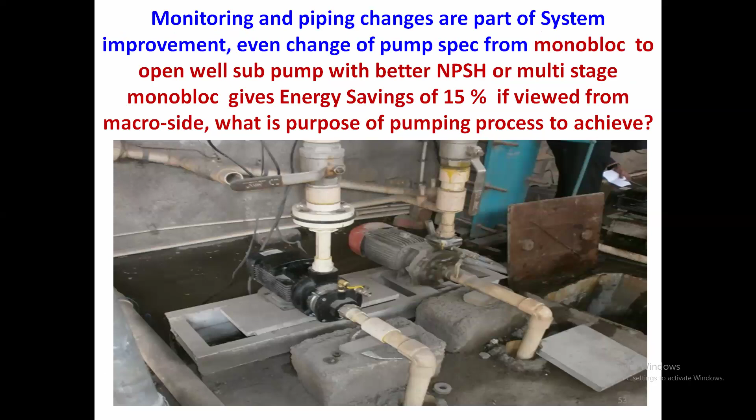So this needs to have edge technology based IoT monitoring, and this needs to be promoted in the industry. Industry has not installed flow meters till now. They need to install flow meters, especially for the compressors, compressed air, and it is not an instant measurement, it is a trended measurement which is made computer compatible, and it will give a lot of inputs to the industry, a lot of inputs to the academics.

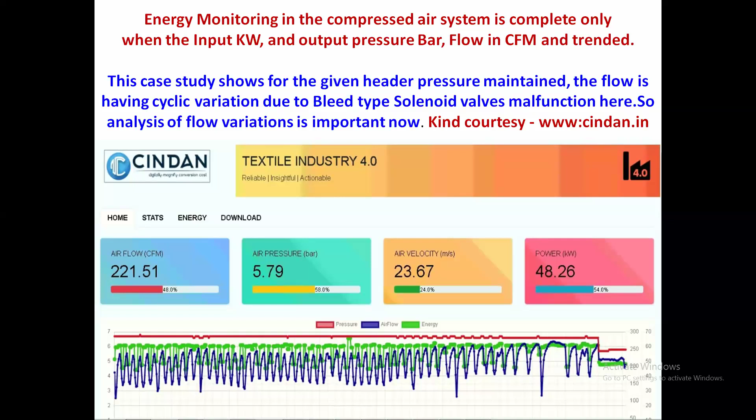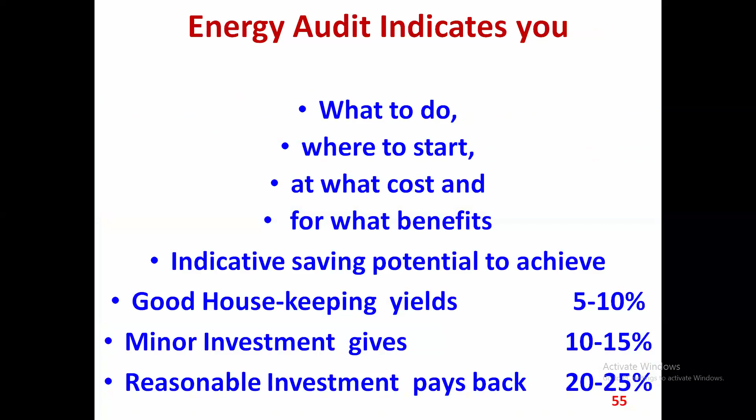What is the thermodynamic equilibrium for the given compressor, what is the isothermal efficiency of the given compressor, all these things can be studied here. So an energy audit, not only for the building, I said around 15 to 20%, for the industry also, housekeeping itself can give around 5 to 10%, minor investment around 10 to 15%, and reasonable investment around 20 to 25%.

These are all the tools we are using: a power quality analyzer, because power quality is definitely made mandatory now. Even our inverter compressor or inverter fridge is having so much harmonics, H5 and H7, especially on 3-phase systems, especially in the industry, this is creating havoc now. And the instant clamp-on power meters, then the thermal imagers, then the anemometers and the static Pascal meters, etc.

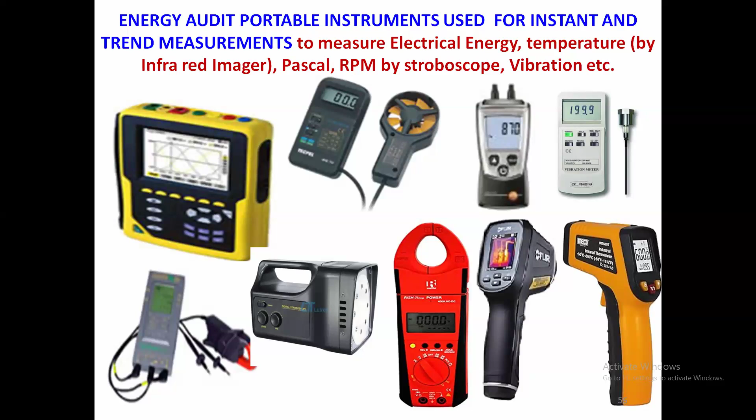So if you view from the academic side, thanks to the respected professors for giving this opportunity to share my thought process. The academics can make a big way inside the industry, provided you have basic instruments like this. I'll give all the pricing details of all these instruments. It can be less than a lakh or more than a lakh, but a person visiting an industry along with the meters makes more sense, and the industry wants only people who can take readings of their own hotspots, or the measurements, the electrical inputs or the process measurements. They are more interested in that.

It will definitely be a win-win situation for the academics, for the college people, for the college professors and the team to visit each and every MSME, because MSMEs cannot afford to buy all these tools and tackles. We can definitely give a big way to the industry and give a lot of inputs to the industry. Your support is very much needed in the industry.

So ultimately the industry or the Bureau of Energy Efficiency says improved energy performance means it is not only making the equipment energy efficient. Also, instead of running for 4 hours, you can run it for reduced operating hours. You can run it for 3 hours. This is where we are trying to achieve either on the time baseline or on the baseline energy use. Both energy savings are possible, with respect to time or with respect to energy.

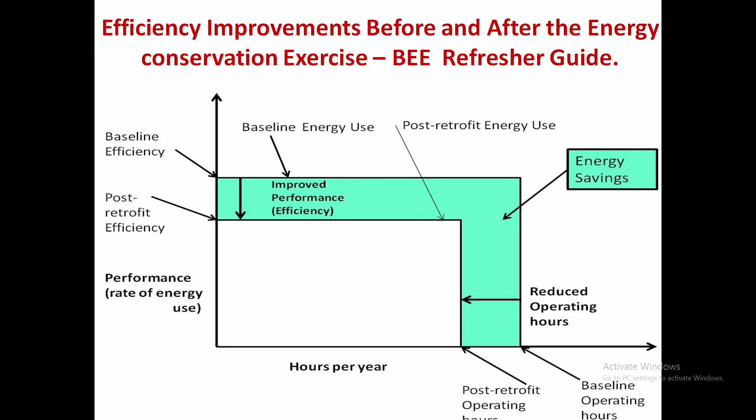So the pumps are around 30 to 40%, the 5-star rated pump around 70 to 80%, compressor around 4 to 5 CFM, whereas 7 to 8, almost doubled. If we see the blowers, around 30 to 40%, it is around 80. These are all the areas where the gap between the efficiency of the existing machine or utility and the efficiency of the new energy efficient utility is around 40%. We can very much address the gap. I don't say they have to replace totally. First, let us make them understand: run the machine at energy efficient loading and try to achieve minimum loss. If that is not possible, go for replacement.